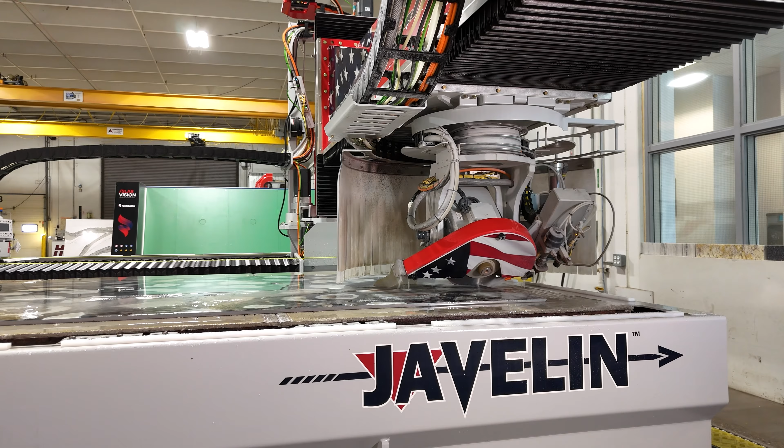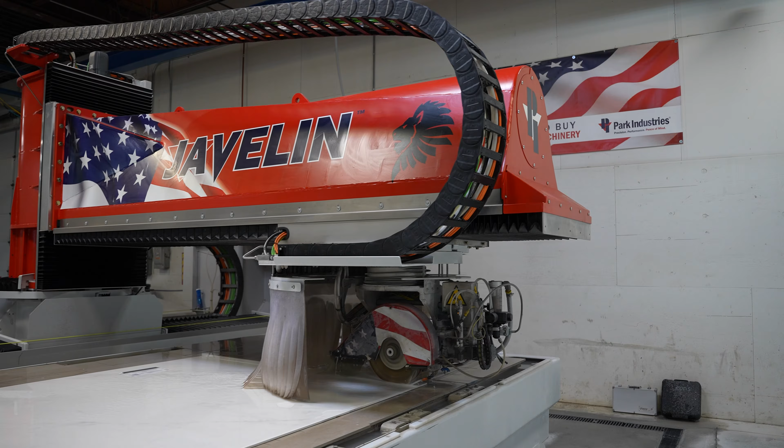Brian, share with everyone our main focus for today's episode. Porcelain has been a trending topic for stone fabricators for the past several years, and it continues to gain popularity as an excellent choice for countertops, bathrooms, fireplaces, and more. And while many fabricators have embraced it by now, some have yet to do so. A modern stone shop should be able to process any stone-like material efficiently, whether it's granite, marble, porcelain, or quartzite. Exactly. You need a machine that can be optimized to the material that's on the table.

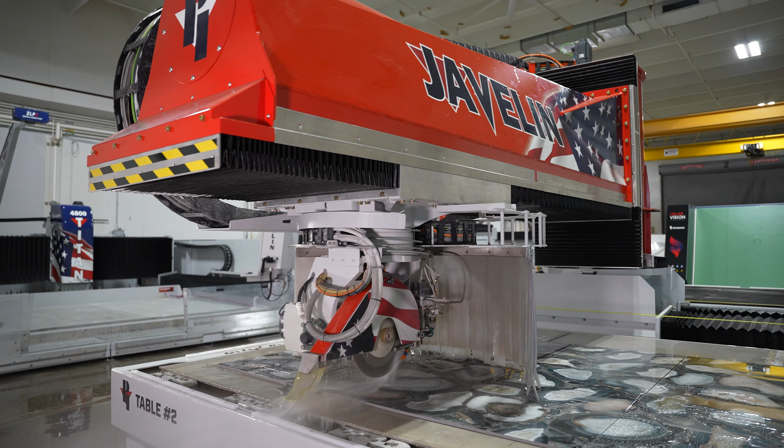With that said, what machine are we using today? Today we're going to use our latest and greatest, the Javelin CNC SawJet. Plus, in this episode, we'll show you porcelain tips and tricks applicable to any saw.

What specific material are we cutting today, Brian? Today we're proud to have Infinity Surfaces sponsor with our Cammeo porcelain slab. This provides the look of an exotic agate slab, but with the durability of porcelain. That's an incredible slab of porcelain. I can't believe the level of detail in it.

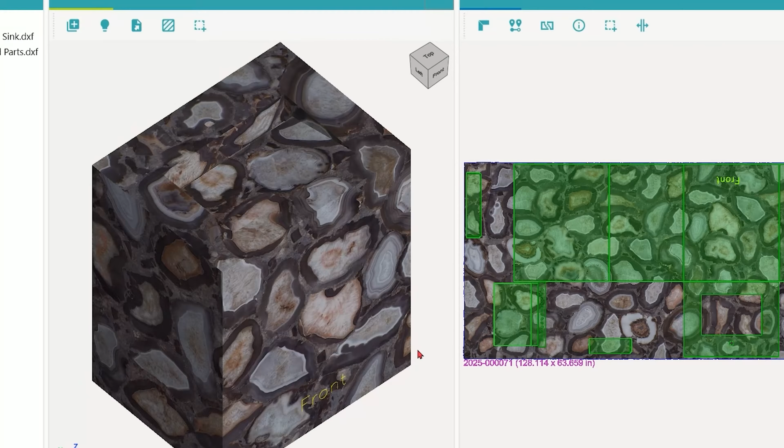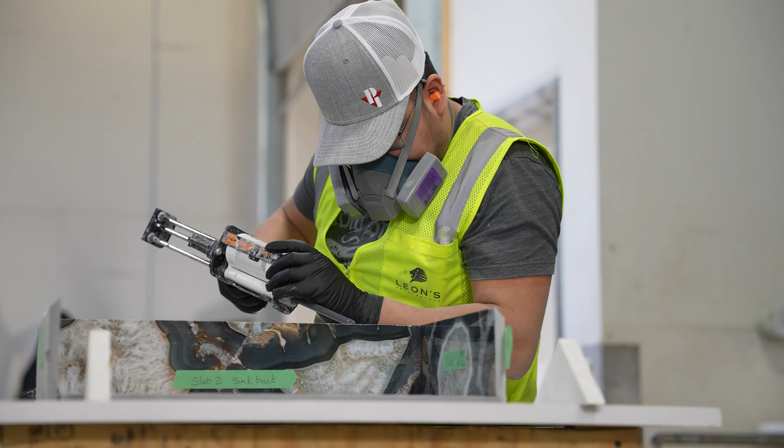What do you have in mind to create with it? We're going to turn this into a fully wrapped, integrated sink full of miters and vein matching, something that's very popular in the industry today. Plus, at the end of the episode, we're going to have a special guest helping us put it together so we can show you the final results. Awesome, I'm excited to get started. Where do you want to begin? Darren, let's go start at the Slab Vision scanner. Let's get to it.

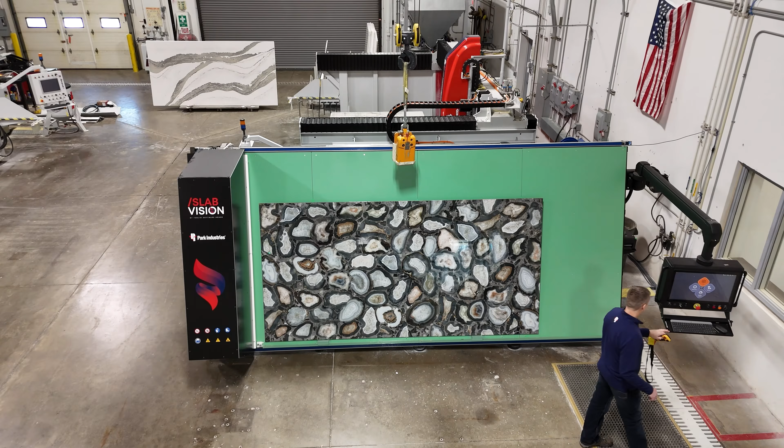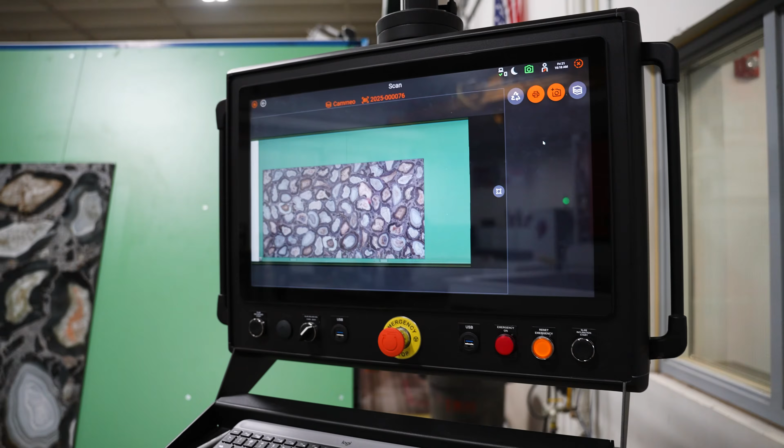Here we are in front of the Slab Vision scanner, the latest tool on the market for capturing and digitizing slabs. It provides a high-resolution image of the slab, making it easy to vein match and lay out your countertops. That's exactly right, Darren. And as we know, more and more of these materials are becoming more detailed, whether it's a complex pattern like this Cammeo porcelain we're working with today, or a design with fine, light veining.

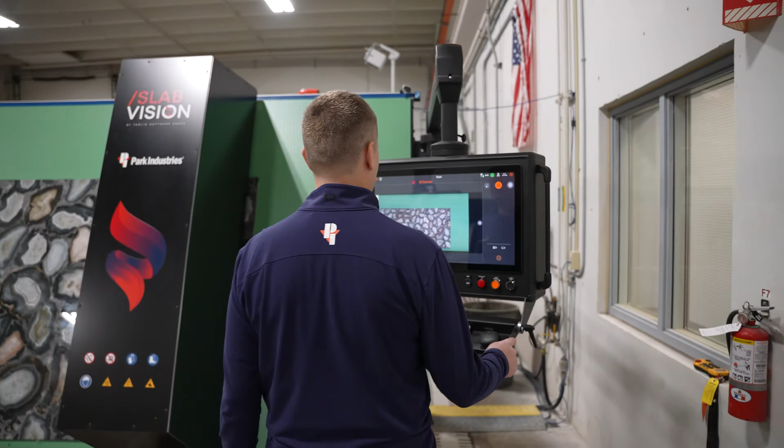A high-quality image is crucial. I hear that all the time from my customers that do high-end custom work. They need that fine detail in the digital image, and the Slab Vision provides just that. Okay, I'm ready to head to the studio to finalize this layout, and then we're going to talk programming this porcelain.

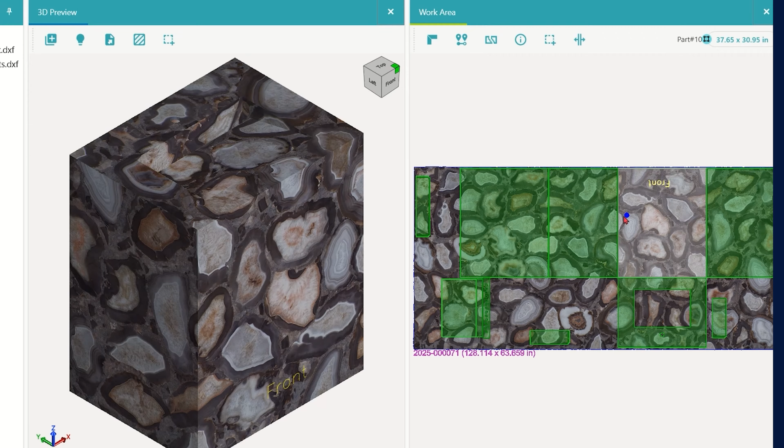So we're going to start with T-Match and show you the layout. We used just one slab on this, so as you can see, I have it all kind of just laid out. The important thing for me was to have the front and the two sides vein match, and then I also wanted the front with the countertop to vein match. In this image, you can see that it pulled together very nicely.

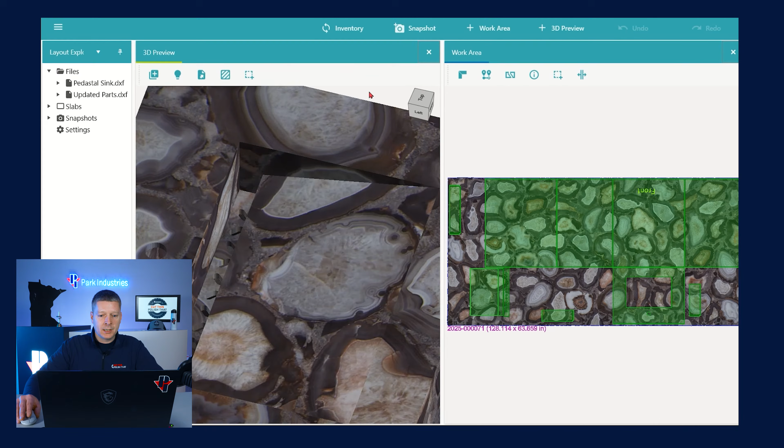With the 3D layout functionality inside of T-Match, it made it much easier to work with modeling this sink up so that I could get vein match on all these little parts and get them angled in the right orientation as to how it would be when it's finally assembled. So now we have a very good idea of what our final project will look like.

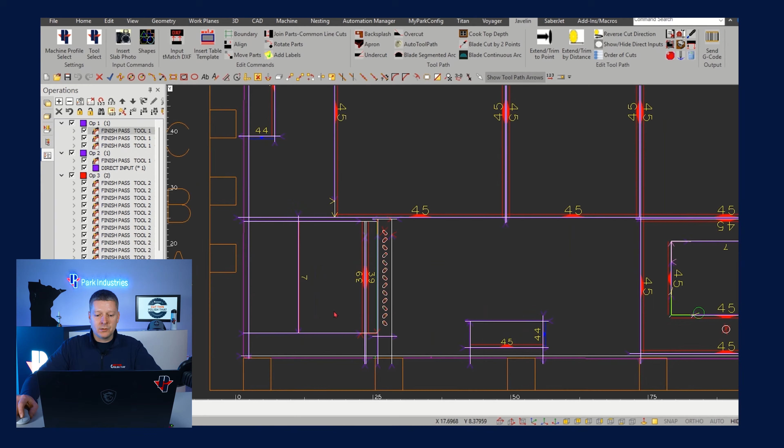One thing you'll notice is I have all of these little water jet cuts inside this drain. I wanted to make sure that I had those cut out before I cut this part loose, and I also did this with any other smaller parts that I was worried about that it would maybe move. So I ordered cuts in the way that I would get the smaller cuts done first before I would release them from the main part of the slab.

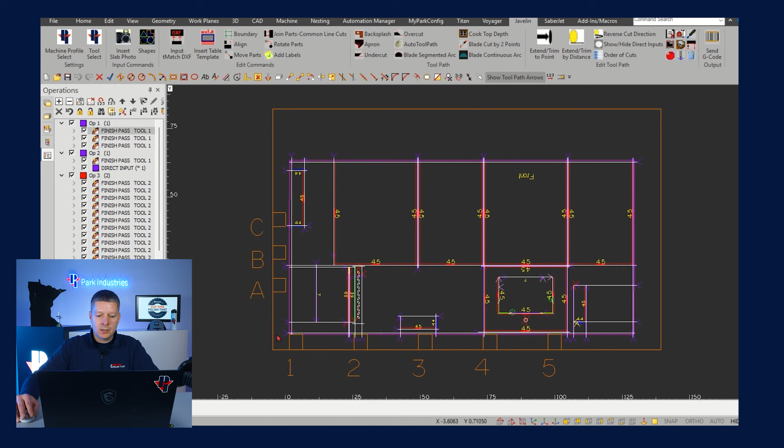A few things I've learned that are important for cutting porcelain: make sure you do your perimeter cuts first to relieve any tension, and control the ramp in and ramp out of those cuts. Park has made it very simple with our ultra compact feature, so we can have our own specific settings for ramp in and ramp out, and the distance on straight cuts and miter cuts.

We also built in a command to automatically apply our tension band cuts, and we can have the Park pause right after the last tension band cut. That way we can remove any little thin strips of material so they don't get ejected by the saw when making other cuts.

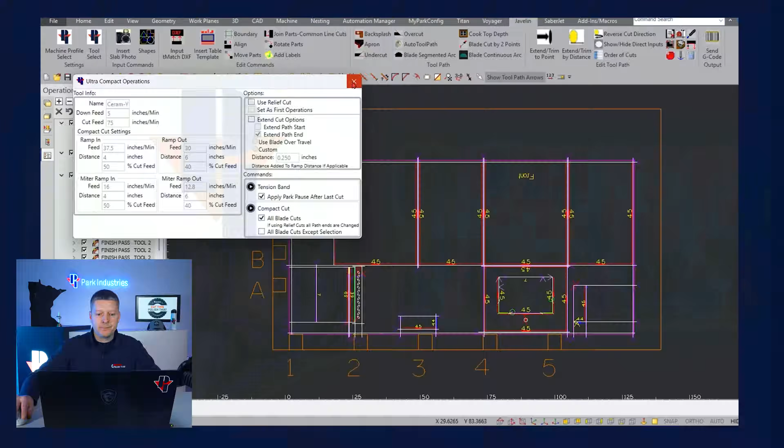Just a quick recap: make sure you do your tension band cuts on the outside perimeters, and start from the outside in anytime you can when making cuts. Do any small part cutting first so you don't have to worry as much about parts moving on you. Also, if you can control the ramp in and ramp out of your feed rates, that will help you a lot in not having part damage.

Okay, so there was the layout and the programming. Let's go cut on the Javelin.

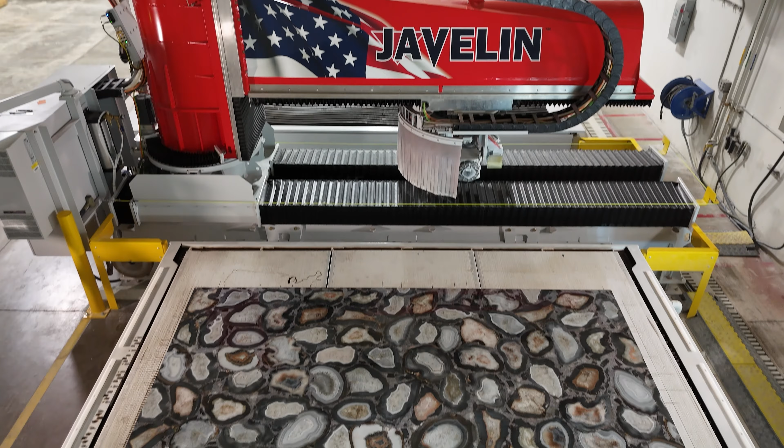Okay, Darren, so we have the porcelain slab loaded up, the program is loaded up, so we are ready to start cutting. Let's get this machine to work.

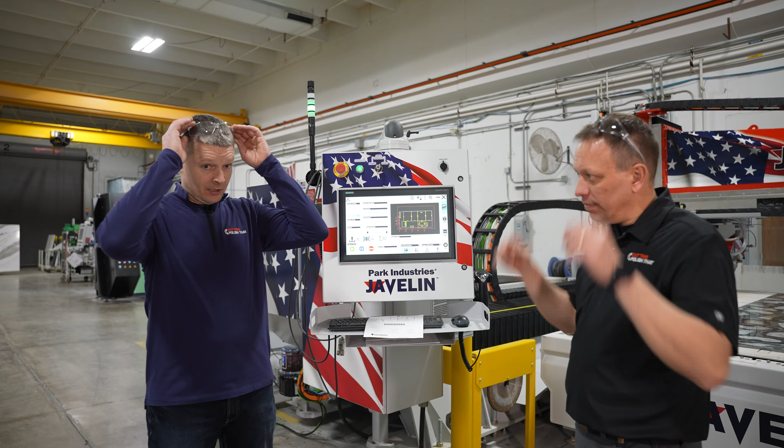Some of the very first cutting you'll see is the Javelin taking off the perimeter tension band strips off of the slab, doing that on all four sides. Take note that this machine is way over on the far side of the slab—you can see the Javelin does that with ease and has no struggles getting way out there.

You'll see the last perimeter cut we're doing—I actually used this as one of the miter cuts on the part, so it was kind of a dual purpose cut.

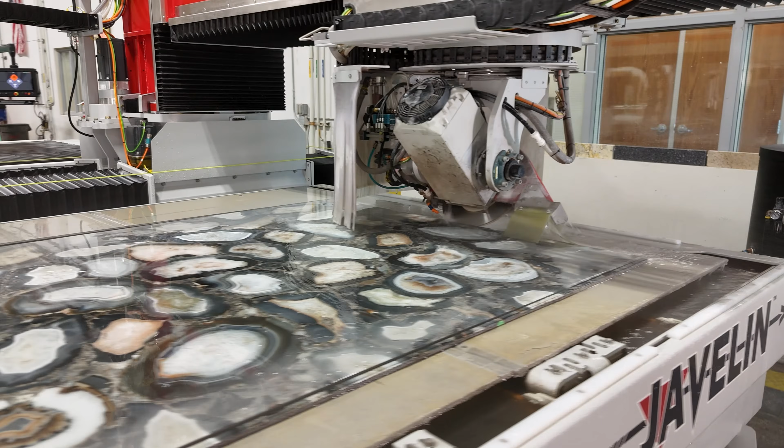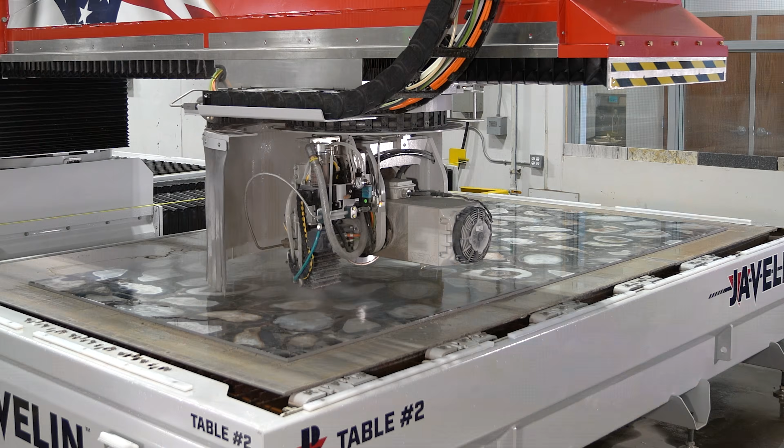Next you'll see us doing all the low pressure piercing for that nifty little drain we put inside this sink. One thing I like about working with this 12mm porcelain is how minimal the time is to pierce through it—only maybe 3 to 4 seconds. After all the piercing is done, we're cutting out all of our little oval or pill-shaped cutouts for the drain.

Now we're starting to make some cuts, starting with a smaller part here toward the outside edge of the slab. If you're watching closely, you can see the ramp in and ramp out—remember, that's automatic, that's in the program. You don't have anybody standing by the saw controlling it manually.

One thing about this cut is it's a collinear cut. This cut is used to cut the top miter of every panel on the outside of this project.

The next series of miter cuts you're going to see are cutting out the individual panels—all four sides that make the vertical part of the sink.

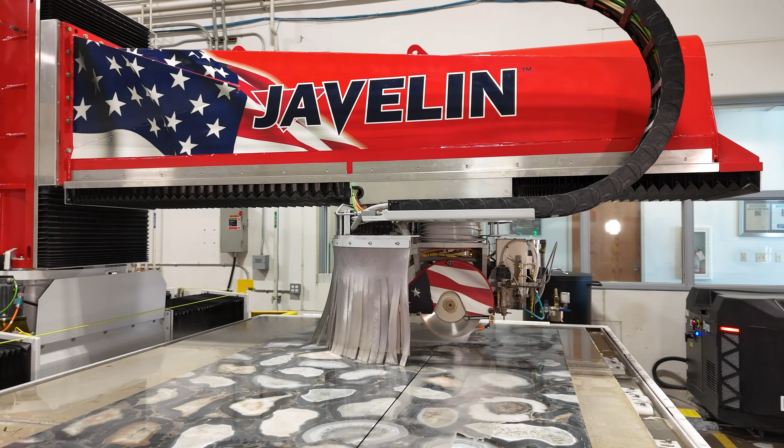For the sink pan, you can see this is just a very minute miter cut—it's only at 7 degrees.

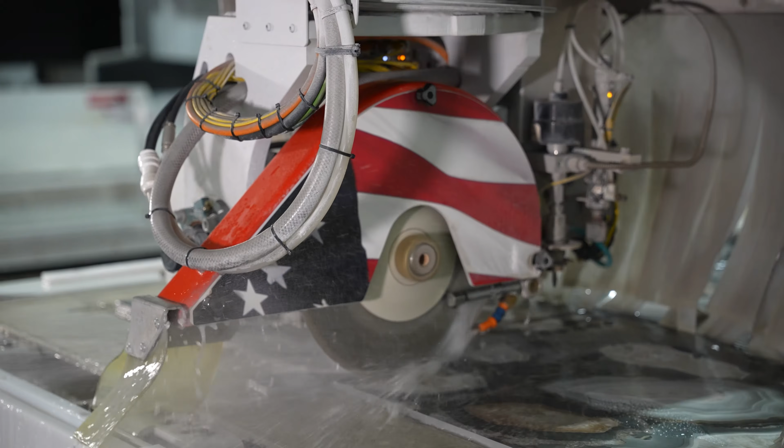Now you're seeing the water jet come over to work its magic on our sink. It's going to start with the faucet hole, so I don't have to drill that out by hand. It's also going to clean up those 45-degree inside corners with one sweep of the jet, so I have zero to minimal cleanup on those corners.

Having a 5-axis saw jet in your shop like the Javelin will help make your work so much easier, so much faster, and you'll have a lot less handwork and labor going into your product.

All right, so this is our final cut. Program is done. As you can see, the Javelin made this very fast and easy for us.

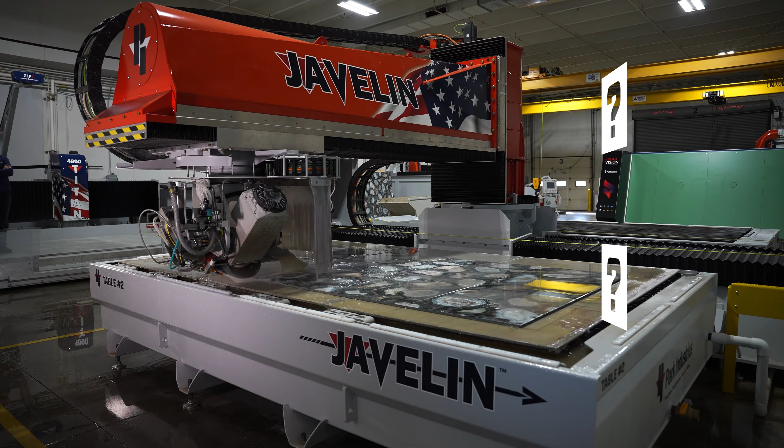So do you think you could break down how many cuts were in this project between straight cuts and miter cuts? We had 13 straight blade cuts, 25 miter blade cuts, 19 straight water jet cuts, and 10 miter jet cuts. That brings us to a total of 67.

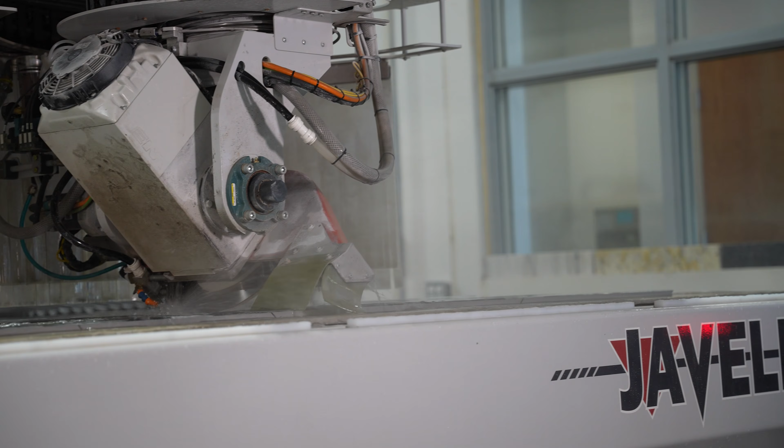Even though cutting porcelain takes a little extra time, we are very happy with how fast the Javelin did it—in just over an hour, especially considering we had 67 cuts in total.

Okay, as promised, I wanted to share with you some best practices for cutting porcelain. The first and foremost is making sure that your table is in excellent condition. You want to make sure that it's level and flat and is going to have good support for the porcelain.

You also want to optimize your blade cutting by using the Park Industries Ultra Compact feature. That way it ramps in and ramps out automatically and you don't have to stand by the machine.

Blade selection is also important when you're cutting porcelain. Make sure that you consider a trusted brand like we did to make sure that you have accurate cuts.

Another tip that I have is making sure that you have a very high water flow and also that the water is pointed or directed to the right place where you need it on the blade. Blade glazing can be a real showstopper and cause you a lot of frustration.

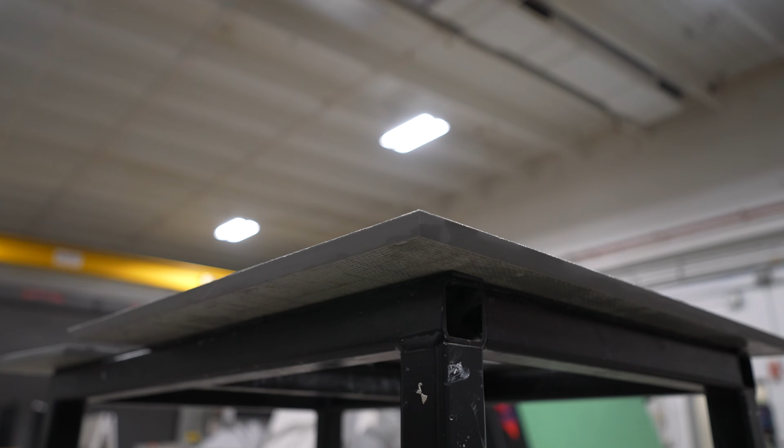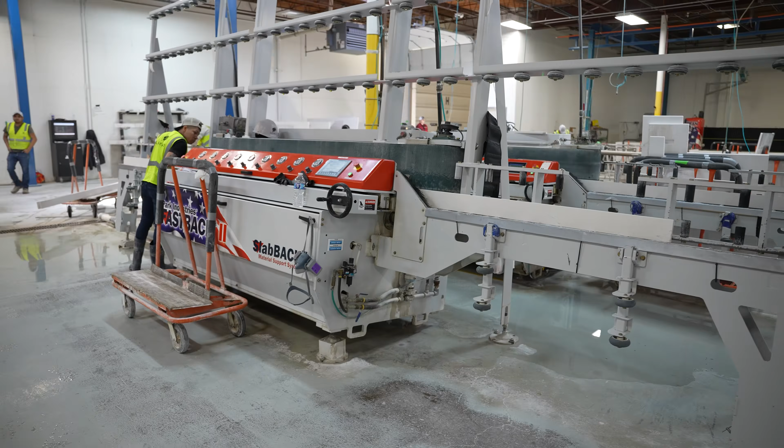For assembling this project, we've teamed up with one of our valued customers, Leon's Countertops. Leon's Countertops is a leading fabricator in the great state of Minnesota, the home of Park Industries. They excel in this type of work using their Javelin CNC saw jet.

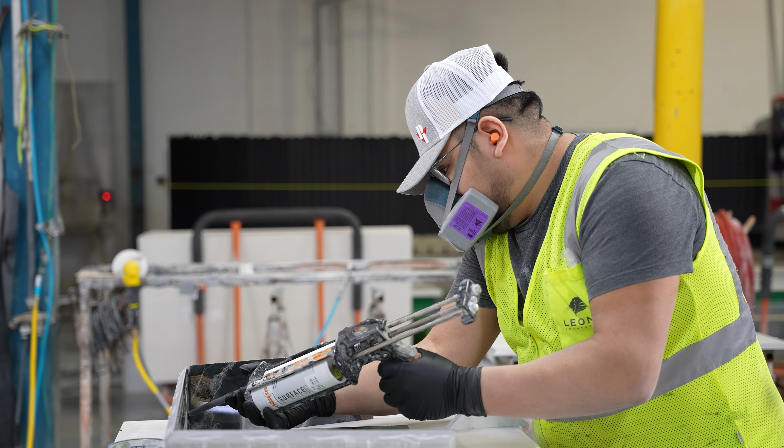Hi, I'm Dan King, the General Manager here at Leon's Countertops in Minneapolis, Minnesota. We're really excited to be helping Park Industries put together this custom porcelain integrated sink. For us at Leon's Countertops, as we're growing in the market, it was important to us to bring in a machine like the Javelin that helps us with scalability.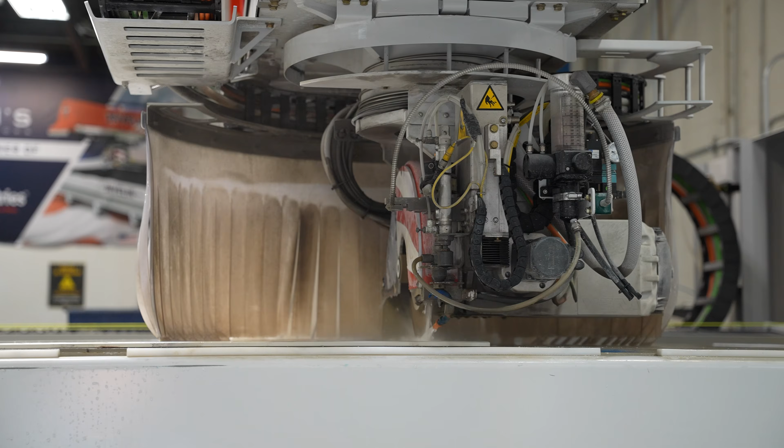It's highly precise in its miter cuts, which helps us achieve the results we're looking for, and more importantly, our customers. We've been working with Park Industries for probably close to 10 years now, and we love it. The relationship, the service that we get from them is impeccable.

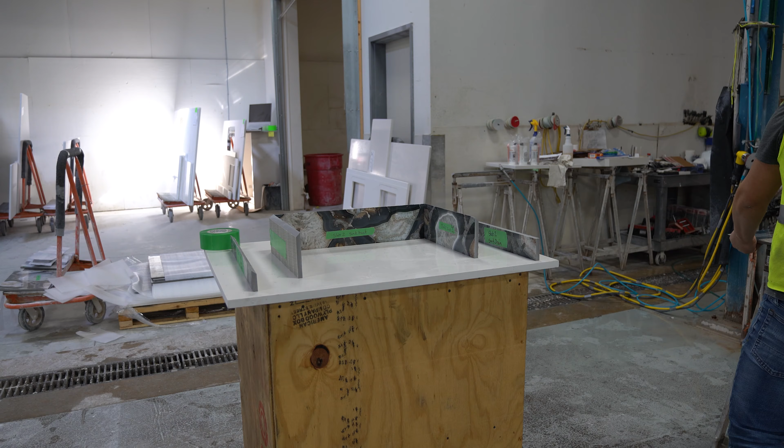So here you're seeing the team just kind of dry fitting and test fitting the parts to make sure that everything lines up correctly. Looks like it does. So they're gonna go right into getting these parts glued together.

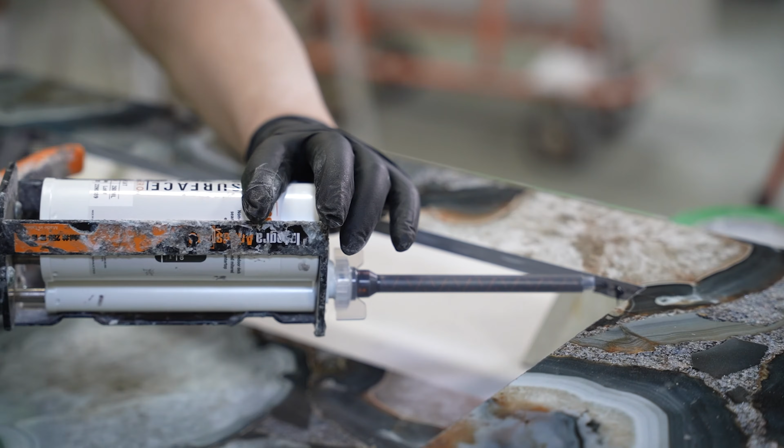This is always a moment of truth for any fabricator. Taking those parts off the saw and putting them together to make sure that they fit the way that you hope they would. But I had no worries because I had trusted machines from Park Industries with the SlabVision and the Javelin CNC saw jet.

Let's go ahead back to Park and show you the final results.

Here we are back at Park Industries, and the time has come. Okay, we're ready to show you guys the results of our mitered integrated vanity sink. Take a look.

Okay, Darren, so you're getting your first look at this sink. What's your first thoughts? I think it's beautiful. I mean, the Javelin absolutely crushed it, and Leon's did a fantastic job putting it all together.

I couldn't agree more. All these miter cuts are nice, crisp, clean. It's got a great squared look to it. The vein matching is phenomenal. I agree, and the level of detail in this material, I couldn't imagine doing this without the SlabVision.

So do you see this gaining more and more popularity when you're out talking to your customers? Are they looking to do more porcelain or maybe do a little more challenging project like this with an integrated sink? Absolutely, it's a growing trend, but I think a lot of people are just scared to do this type of work. But I think this project really showed that if you have the right machine, the right settings, it doesn't have to be that difficult.